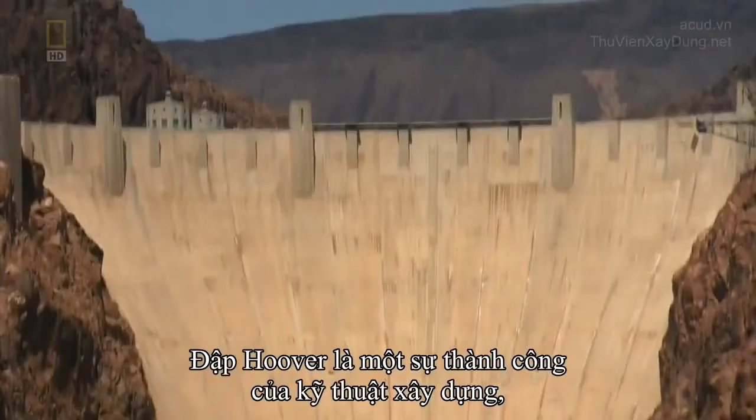The Hoover Dam is a triumph of civil engineering. A spectacular edifice of sculpted concrete, rising majestically in an imposing canyon, taming a wild river once thought to be tameless. A colossal statement, man conquering nature.

But if there was no Hoover Dam, and one must be built, how would engineers build it today? What would they do differently? And what would stay the same? How could we reinvent the Hoover Dam?

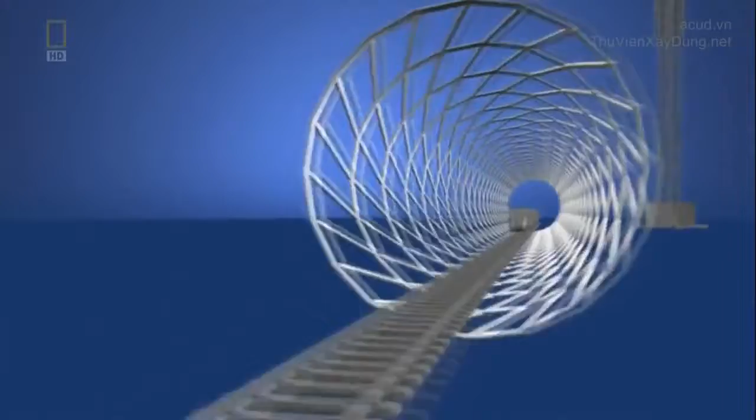The Hoover Dam is an American icon. The United States Bureau of Reclamation built it in the 1930s, and it's been the model of modern dam engineering ever since.

It has three main purposes: to harness the wild Colorado River and control flooding, to store water to irrigate vast desert farmlands and quench the thirst of growing cities such as Los Angeles and Las Vegas, and to provide clean, consistent power to the American Southwest, enabling a population boom unmatched in history.

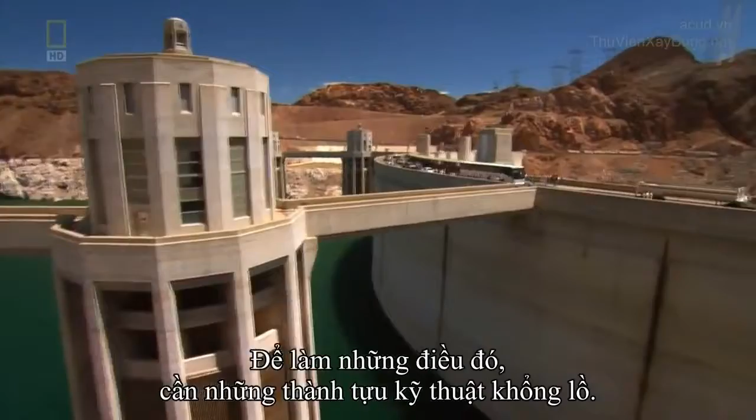To do so required a monumental engineering achievement. When you consider that the Colorado River had been running through Black Canyon for millions and millions of years, actually cutting the canyon in many places, to have been able to move the river, first of all, and then to put this enormous chunk of concrete right in the middle of it was a feat of engineering wonder that had never been done before.

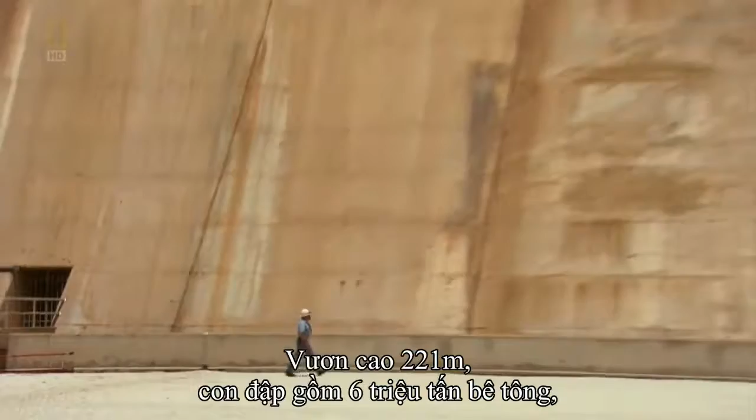When completed in 1935, the Hoover Dam was called the eighth wonder of the world. Rising 221 meters, it contains 6 million tons of concrete, enough to pave a road from New York to Los Angeles. A gigantic concrete pyramid wedged in a desolate canyon, straddling the Nevada-Arizona border, 56 kilometers from Las Vegas.

The reservoir created by the Hoover Dam, Lake Mead, covers 620 square kilometers and has a storage capacity of over 35 trillion liters, enough to cover the entire state of New York in 30 centimeters of water. Hoover's hydroelectric power plant has 17 generators, capable of producing 2 million kilowatts of electricity, enough for 1.7 million homes.

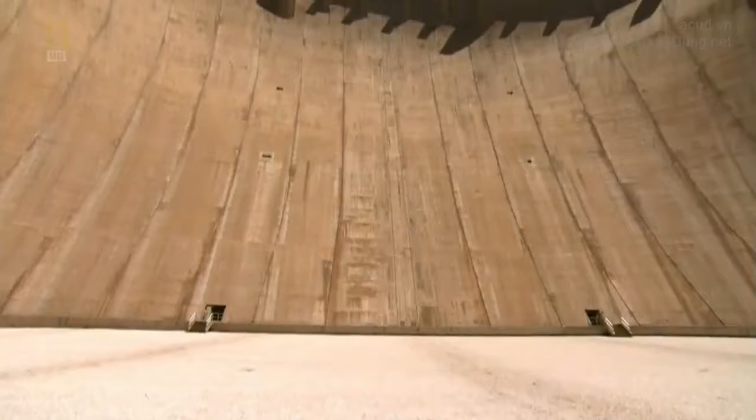I think it's one of the examples of an engineering project where a group of people came together and achieved a very advanced goal as far as the quality of thinking through engineering from beginning to end.

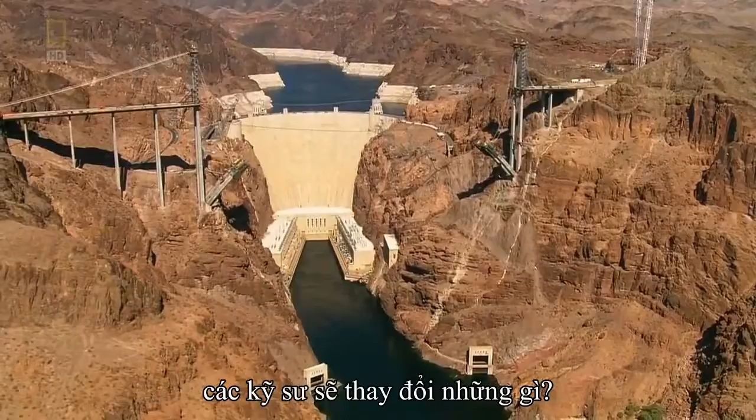But what if the Hoover Dam were built today? What changes would engineers make? And what would they do the same? Would the dam have the same design? Could the reservoir store more water? Could the power plant make more electricity? And what about the environment, above and below the dam?

They really didn't have a sense in the 1930s of ecology and what kind of damage might be done that they couldn't even imagine. They've only begun to realize that in later years. There's this ridge here and this ridge here that are huge natural abutments. We asked a team of engineers, hydrologists, biologists, and dam construction experts to consider these questions and tell us how they would reinvent the Hoover Dam.

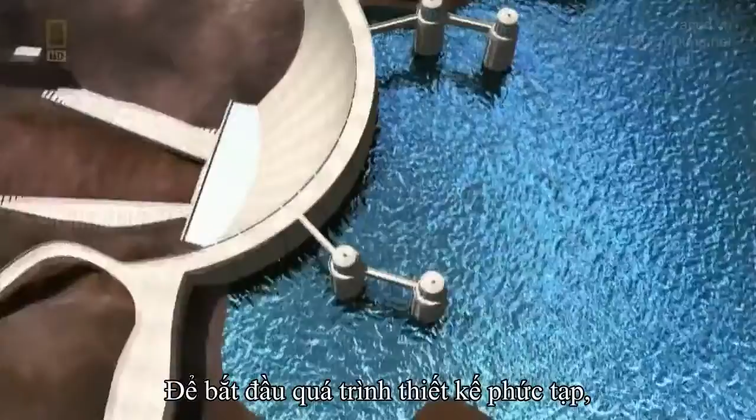To begin this complex reinvention, one must first imagine the location before the Hoover Dam was built. Step 1. Choosing a location. The original survey work was conducted by the Bureau of Reclamation, using the best tools of the day: plane table surveyors for topographical mapping, transits for measuring terrain, and precarious drilling barges barely anchored onto the unruly river, used to drill core samples of bedrock.

Today's survey tools would include GPS imaging of the landscape, laser sighting transits, and computer-aided design software to draft blueprints. Our biggest advantage, you'd have to conclude, is the computer, just the computer system in general. We also have the ability to do aerial survey in a lot more precise manner.

This includes aerial photogrammetry, a sophisticated means of mapping three-dimensional terrain using digital aerial photographs. These modern surveying tools give geologists and engineers a much better picture of the topography and geology of proposed sites.

In the 1930s, three considerations were important to choosing the original location. First, the type of geology of the canyon walls and the depth to the bedrock on the river floor. The rock needs to be strong enough to withstand tremendous loads of water pressure.

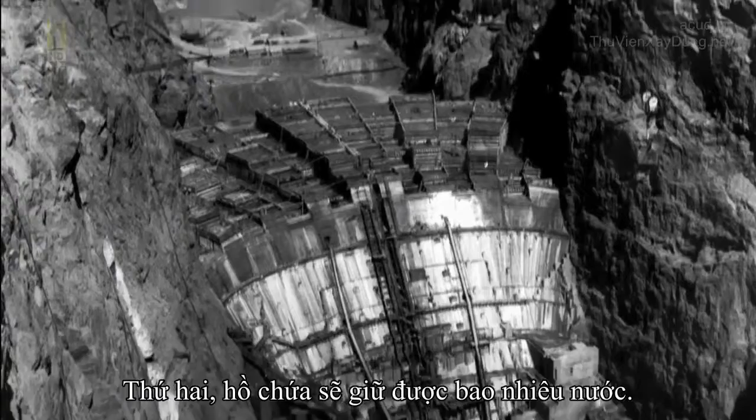Second, how much water could be stored in the reservoir. The more water, the more human benefit. And third, proximity to population centers and major lines of transportation to bring in manpower, equipment, and resources to build the dam.

The process for finding a location for the dam in today's world begins with scanning a lot of topographical maps like this one here. What you're looking for is to let nature, let topography, the existing terrain work in your favor.

After years of study, government surveyors and engineers concluded that a dam of suitable size and storage capacity could be built at one of two locations on the lower Colorado River, in Boulder Canyon or 32 kilometers downriver in Black Canyon. The Boulder Canyon spot was the one that the government favored for a variety of reasons.

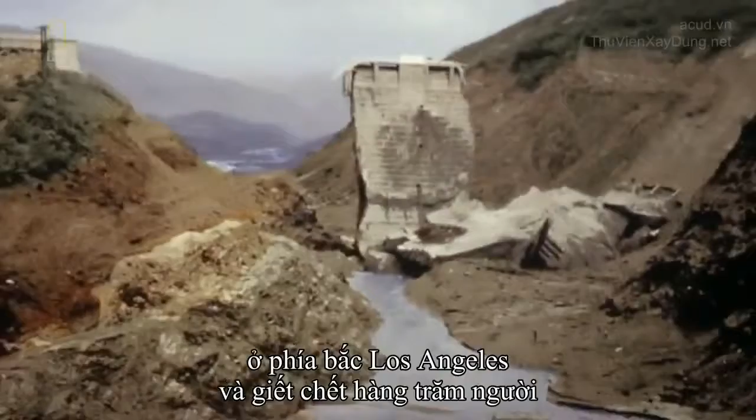But in March 1928, when the St. Francis Dam burst north of Los Angeles and killed hundreds of people, caused millions of dollars worth of damage, the government decided to go back and take a second look at what they were going to do on the Colorado River. The 1928 St. Francis Dam rupture was a crippling blow to the engineers who built it, and a wake-up call to those building Hoover Dam.

Wanting to avoid a similar disaster, government engineers re-inspected both sites more thoroughly and found flaws in the geology of Boulder Canyon. The canyon walls and river bedrock had more fractures and faults, making it less stable. They also determined that a dam in Black Canyon would store more water than one in Boulder Canyon. Finally, Boulder was further away from the nearest railroad lines and population center, Las Vegas. So the government decided the dam would go in Black Canyon.

Original designers of Hoover Dam found an ideal location. After I looked at the topography in great detail, I came to the conclusion that there's no doubt they made the best choice by far. Our reinvention of the Hoover Dam will be built in the same location.

Black Canyon is desolate and severe. A deep, hot crack in the Mojave Desert, miles from the nearest vestige of civilization. No place for human comfort or survival. In the summer, temperatures routinely rise above 49 degrees Celsius on the canyon floor. In the winter, they fall below freezing. It's a hostile environment and the perfect place for a dam. But what kind of dam?

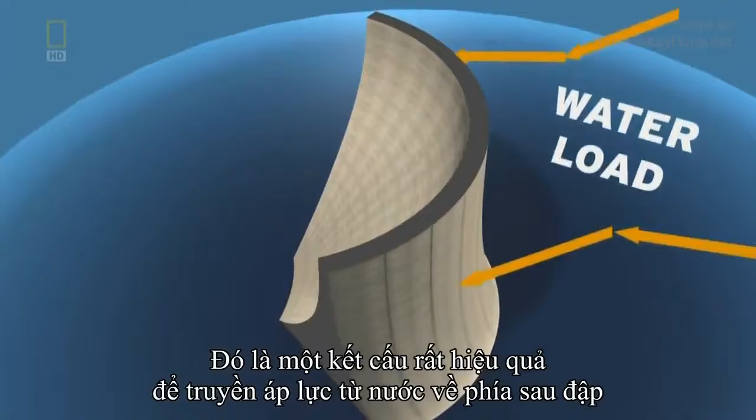And then the upper part that's most visible and prominent is that nice graceful arch shape across the front. And that is a very efficient structure for routing the loads of the water pressure behind the dam into the canyon walls on both sides.

Our reinvention team also envisions a gravity arch dam, but with significantly different dimensions. I certainly wouldn't start out with an ultra-conservative design. We don't have to have quite as much arch, and we don't have to have quite as much width at the base in order to get the strength needed to hold back the waters.

What the team proposes is a narrower dam and much taller, as much as 43 meters taller, capable of storing more water in the reservoir and creating more water pressure for power generation. But that's just the beginning.

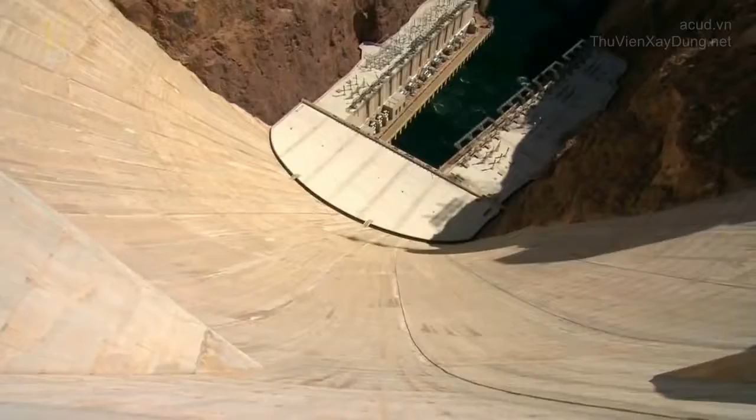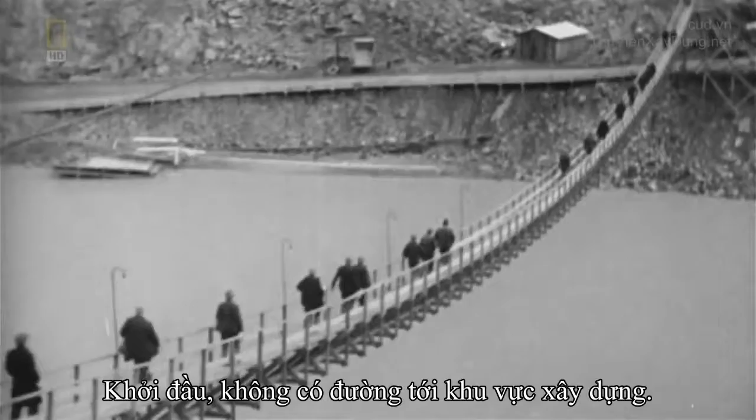The original builders of the Hoover Dam faced many challenges. The first, how to get the manpower and equipment to such a remote location as Black Canyon. To begin with, there were no roads to the construction site. Those had to be blasted out of the steep canyon walls.

50 kilometers of railroad track also had to be laid to connect the construction site to the Union Pacific's main line outside Las Vegas. All built in an environment not suited to human life. Workers came down here to find, first of all, the working conditions almost inhumane. The heat from the canyon, the wind, the lack of cold water, the lack of facilities. It was really a miserable time for workers.

Housing was also a problem. Having a place for the labor to live in the desert wasn't an easy challenge here. Living in a tent in the desert is what you were up against.

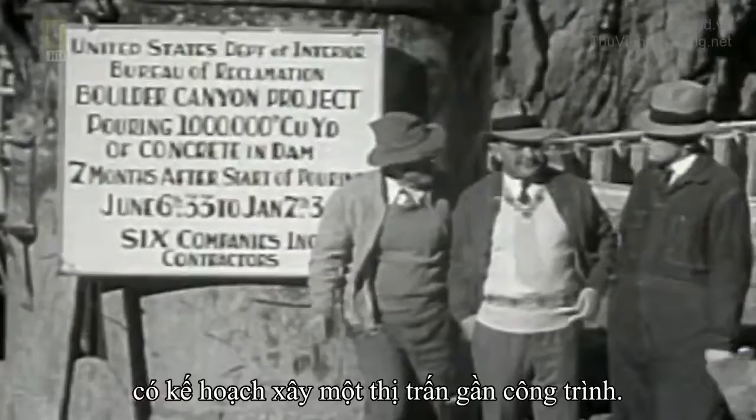When construction began in late March 1931, there were no provisions for a workforce that would eventually reach 5,000 laborers a day. The original builders, the Six Companies Incorporated, planned to construct a company town near the project. But that community, Boulder City, took almost a year to complete. Until then, workers lived in tents and ramshackle bunkhouses along the river with no ventilation or running water.

In any reinvention of the Hoover Dam, the harsh elements would be the same, but worker conditions would be much improved by modern technology. Prefabricated living accommodations would be provided for all workers before the first day of construction. On-site structures with air conditioning would provide necessary relief.

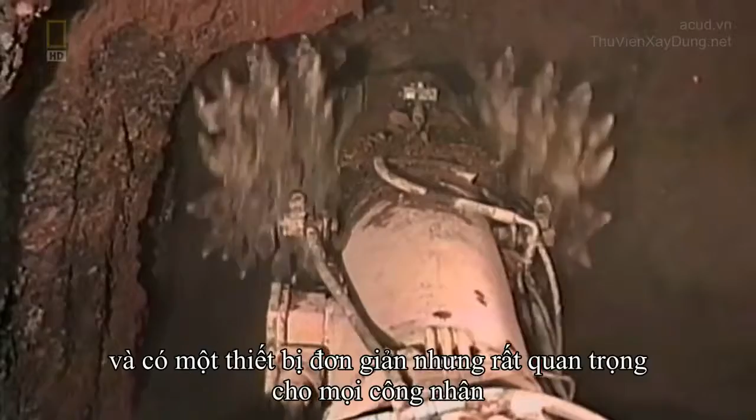Advanced machinery and construction equipment would eliminate much of the tedious manual labor and decrease the size of the workforce by as much as 50%. And there would be one simple but significant piece of equipment for every worker: a hard hat. Today, there's no question, you don't show up on a job like that without a hard hat and steel-toed boots. But that's just the beginning.

I don't think they used any safety nets in the construction of the Hoover Dam. There's no question that we'd use them today. Safety measures were minimal at best. Officially, a total of 112 men were killed during the 5 years of construction at the Hoover Dam.

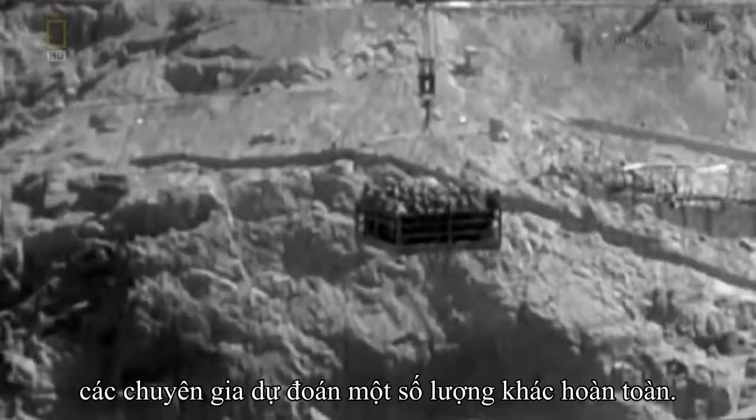In any 21st century reinvention, our experts predict a different number. You would expect no casualties. At least you would be striving for no casualties. You may think cost, you may think schedule, but safety has always been the #1 factor in all construction projects.

The first major task of any dam construction project is the diversion of the river that is going to be dammed. The work site must be completely dry before work can begin on the foundation. The time-tested method of river diversion is the construction of diversion tunnels.

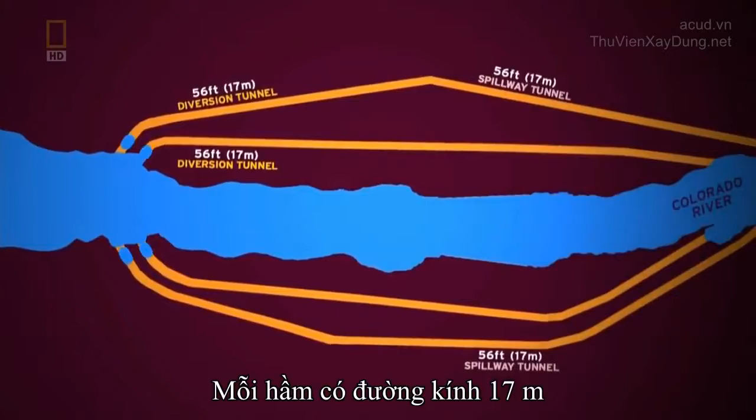In the 1930s, the builders of the Hoover Dam spent nearly 2 years drilling 4 enormous diversion tunnels through the rock canyon walls, 2 tunnels on each side of the river. Each tunnel has a 17-meter diameter and is about 1,200 meters long. Altogether, the 4 tunnels are capable of moving enough water to fill 2 Olympic-sized swimming pools every second.

The method of tunneling in the 1930s was also time-tested: drill, blast, and muck. And it means just what it says. You drill the holes, you put dynamite in each hole, you blast the dynamite, and then you muck out the rock. Crews used an improvised truck called a jumbo, which allowed as many as a dozen workers to drill the face of the tunnel at the same time.

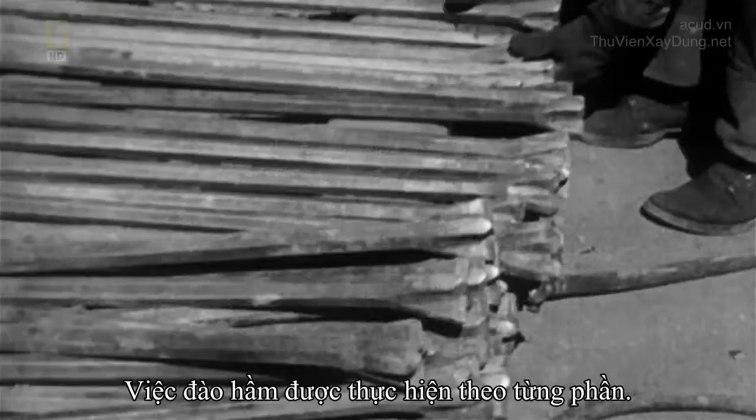The excavation was done in sections. First, the top or heading of the tunnel was blasted and mucked. Then the middle, or bench. And finally, the bottom, or invert section. As each section is drilled and blasted, it is then reinforced with steel. By using the jumbo, the builders of Hoover increased tunneling speed and excavated as much as 14 meters a day.

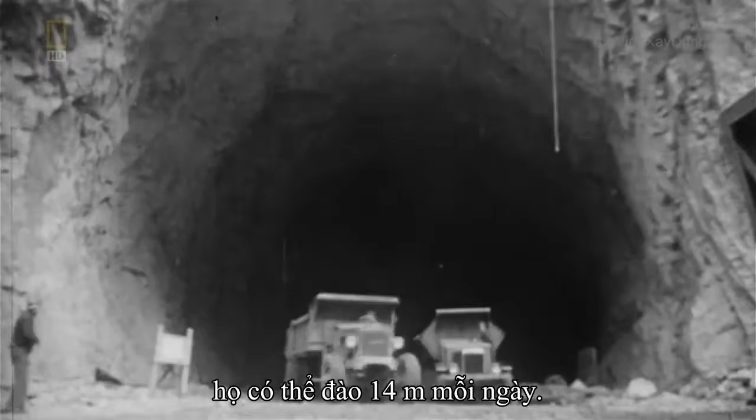But it came at great peril, because there was no ventilation in the tunnels. They were running trucks, internal combustion engines in this enclosed space. So many workers were gassed with carbon monoxide. Some of them died because their pulmonary system was weakened from the gases.

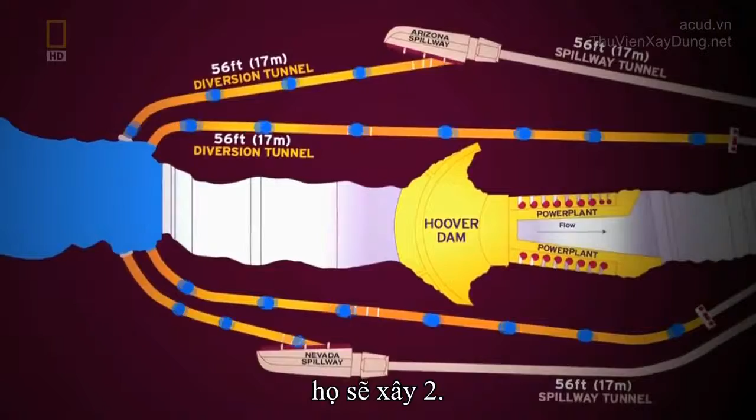Today, our reinvention team proposes a radical redesign of the diversion tunnel system at Hoover. Instead of 4 river diversion tunnels, they would build just 2, one on each side of the canyon. They would be the same length as the originals, about 1,200 meters. But they would be much larger, 21 meters in diameter.

The team would also use a state-of-the-art method of tunneling. The method we use is going to be called the New Austrian Tunneling Method, or in short, NATM, N-A-T-M. Here on the coast of California, near Pacifica, the California Department of Transportation, Caltrans, is using NATM to build 2 new bypass tunnels along a treacherous stretch of Highway 1, known as Devil's Slide.

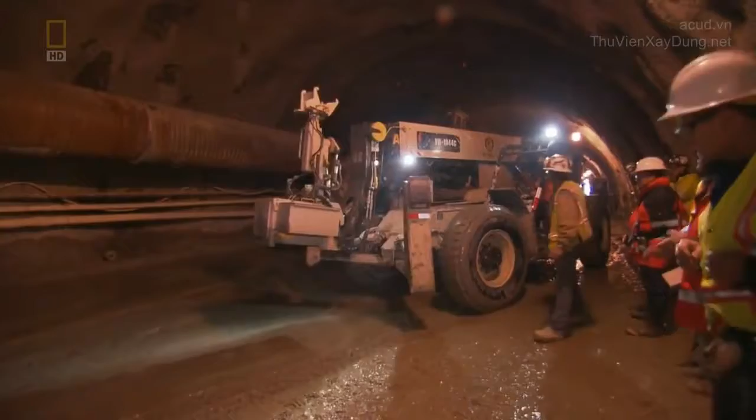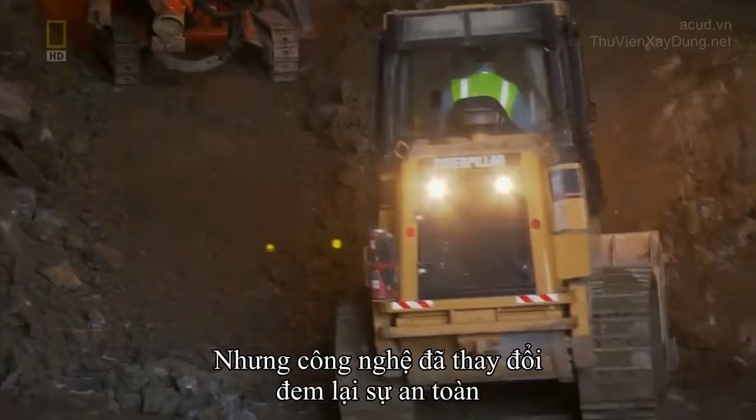Well, this project's been in the works for about 50 years to bypass this geologically unstable portion of the coast highway here. The engineers digging these tunnels are very familiar with the tunneling done at Hoover. This here is very similar. It's also a top-heading bench excavation, and in some areas also invert, but only the technology has changed. And of course, it's a much safer operation than it was at the Hoover Dam.

We're using some state-of-the-art equipment. We have been able to bring the latest technology that is being used in Europe, their latest methods and their latest technologies here in this project.

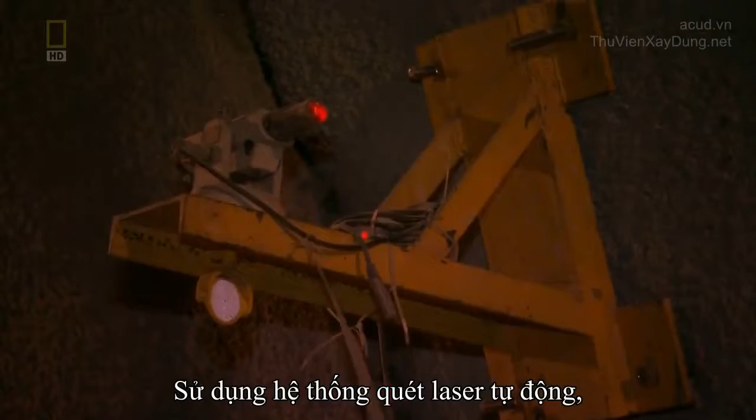Using a fully automated laser scanning system, every 2.5 centimeters of the face of the tunnel is measured and mapped before excavation. This ensures that the tunneling is going in the right direction. Depending on the hardness of the rock, engineers then choose a boring method.

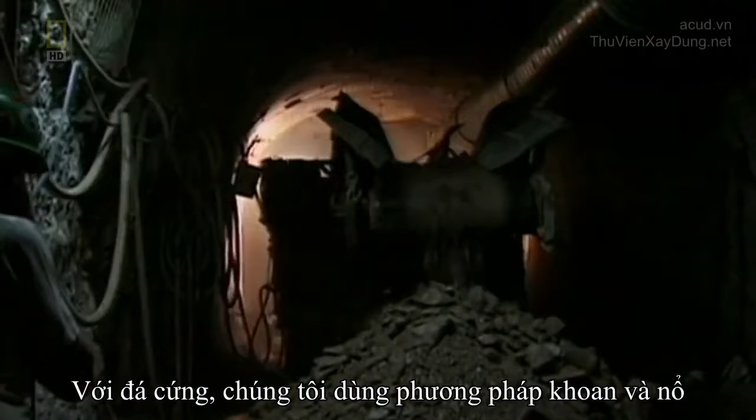There are 2 methods which the contractor can choose. One is drill and shoot, and one is using the roadheader. And in harder rocks, he has to use the drill and shoot method, and when the rock gets softer, then he's using the roadheaders. The roadheader is an enormous excavating machine that grinds the face of the tunnel. In 4 hours, it can chew out 2 meters of rock.

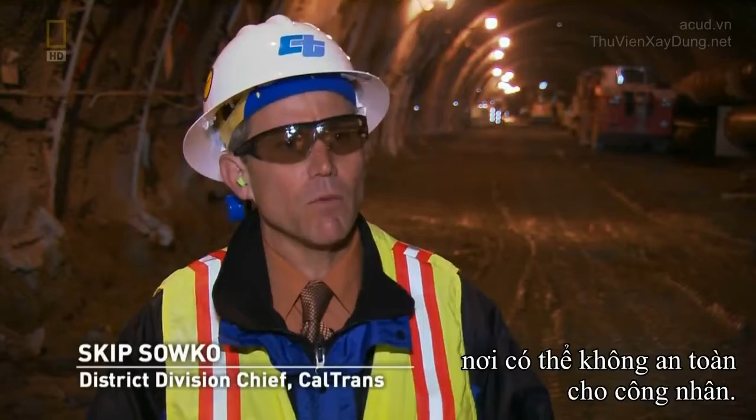After each step forward, the tunnel walls are braced with lattice girders and then reinforced with shotcrete, a type of concrete that seals the tunnel walls. The entire process is geared for worker safety, precision, and increased productivity. A lot of the equipment can be controlled without being in the area where the actual unsafe conditions may exist.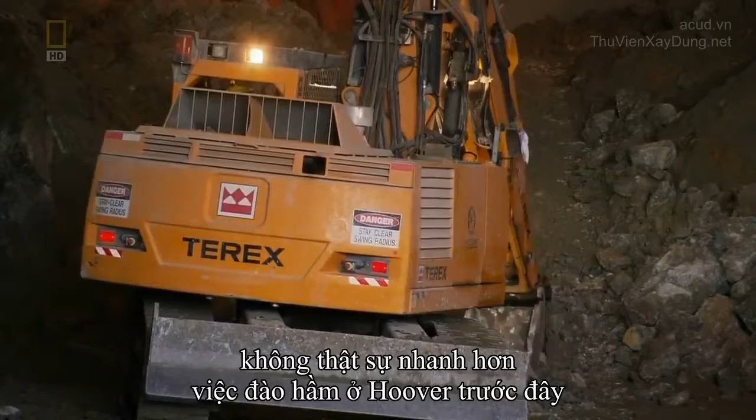So as you move forward, you do a few meters or a meter of excavation. You can do that all under the cover with robotic arms. Using the NATM system, Caltrans excavates about 4 meters of rock, dirt, and gravel a day. Not quite as fast as the original excavation at Hoover, but with much greater efficiency and far less danger.

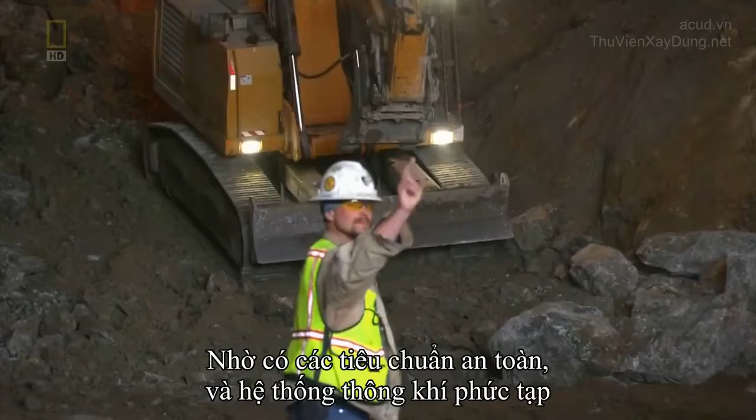In the redesign of the Hoover Dam, the 2 new and larger diversion tunnels would both be excavated using the NATM system. It would take about a year to complete the tunnels, half the time needed for the 4 tunnels built in the 1930s. And because of increased safety standards and sophisticated tunnel ventilation systems, the expected casualty rate would be 0. Once the tunnels are completed, engineers can safely divert the Colorado River and begin to prepare the canyon floor for construction of the new dam.

In the 1930s, contractors began this process by completely drying the riverbed, then excavating loose dirt and sediment down to the bedrock. They also cleared the canyon walls of all loose rock to make smooth abutments for the concrete dam. This work was called high scaling. Workers swung from ropes hanging high over the canyon and chiseled the rock from the walls with jackhammers and sledges.

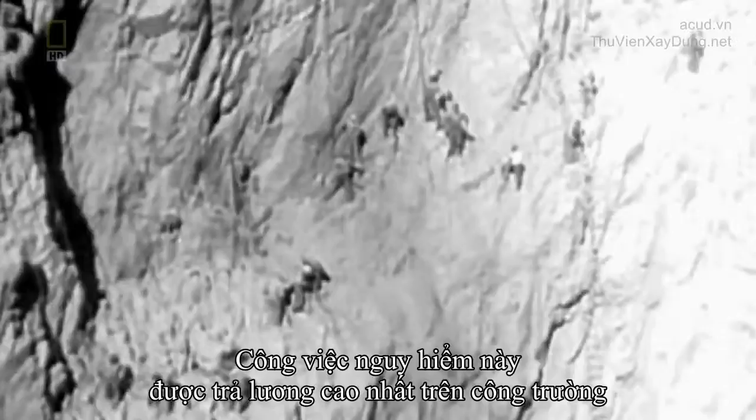These daredevils were the highest paid workers on site, earning $5.60 per day. And they were the most sensational to watch. In today's reinvention, high scaling would also be done in a similar fashion, but with much better rock climbing equipment, nets, and safety procedures.

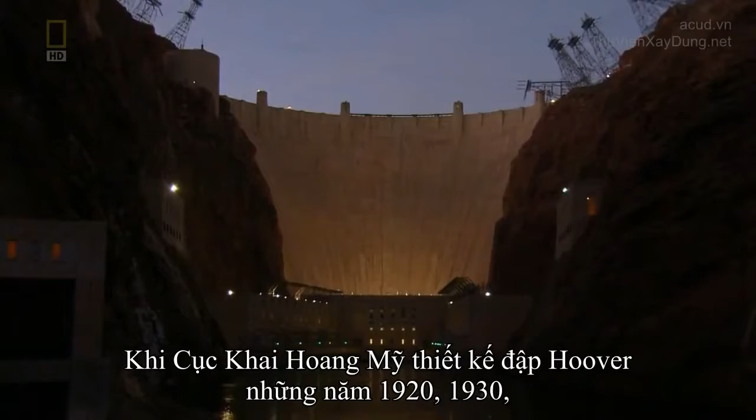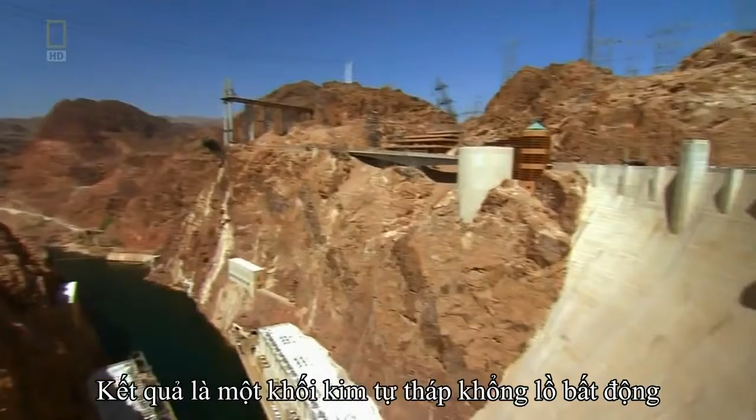When the United States Bureau of Reclamation designed the Hoover Dam in the 1920s and 30s, they adopted an ultra-conservative gravity arch approach to eliminate any possibility of a catastrophic failure. They built the dam with both an arch shape to hold back the pressure of the water, and then just for good measure, they built it as a gravity dam. So it's a combined thick dam and arch dam. The result is a gigantic, immovable concrete pyramid in the middle of Black Canyon, larger than the Great Pyramid of Giza.

The dam contains 3.4 million cubic meters of concrete, weighing 6.6 million tons, enough to build a meter-wide pavement around the Earth at the equator. Using this much concrete, the builders expected the dam to last for hundreds, if not thousands of years. Hoover Dam was far and away bigger than anything that had been built and attempted. And so those designers wanted to make sure that it would last almost forever and be stable and serve its purpose, but would never have an accident or be the cause of a flood as well.

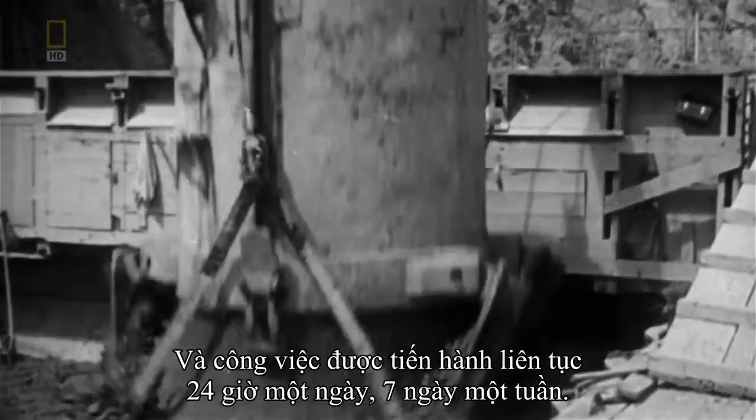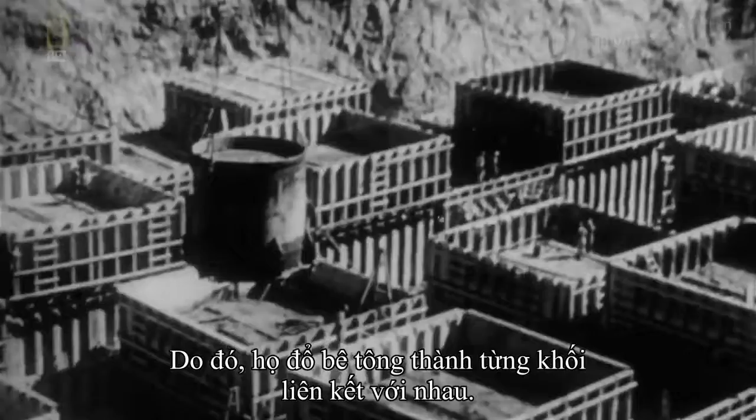The first bucket of concrete was poured on June the 6th, 1933, and the pouring continued non-stop on a 24/7 schedule. Because the temperature of concrete changes as it is poured, engineers calculated that it could take more than 100 years for the dam to cure if built in a single continuous pour. It would also be prone to damaging cracks. So contractors poured the concrete into a series of interlocking blocks. Wooden forms for each block measured up to 18 meters square and were about 1.5 meters deep.

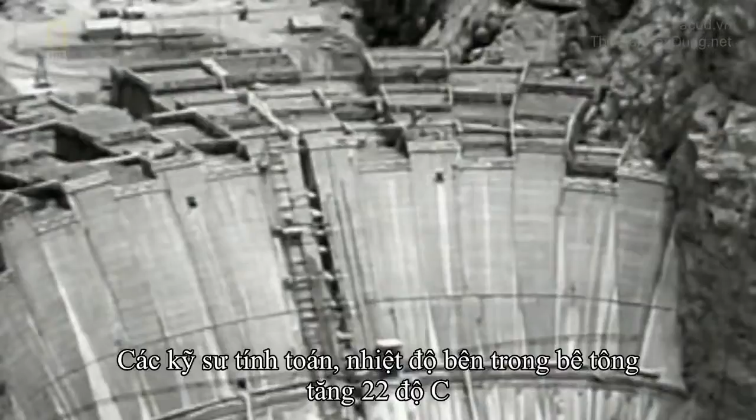Even in these small forms, cooling the concrete was still a challenge due to the intense summer heat in the canyon. Engineers calculated that the internal temperature of the concrete rose 22 degrees Celsius from 49 to 71 degrees. To solve this problem, the original builders installed a grid of pipes in each block and ran cold water through the pipes after the concrete was poured. In all, they used nearly 1,000 kilometers of piping. In March 1935, after 2 years of pouring concrete, the imposing, magnificent edifice of the Hoover Dam was finally complete.

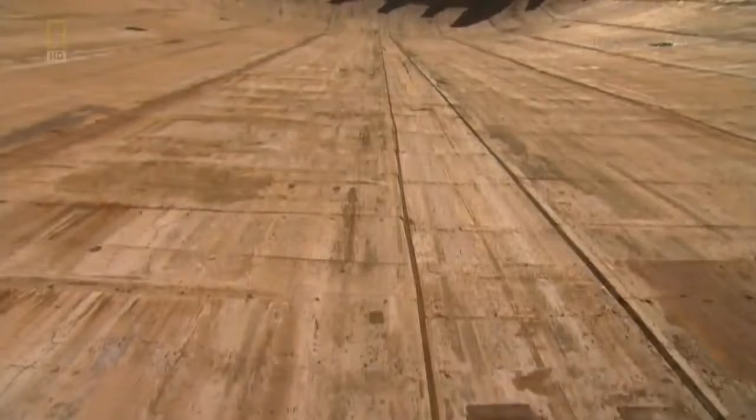Our reinvention team sees a different edifice in Black Canyon. They envision a dam rising 43 meters higher than the original, reaching 264 meters above the canyon floor. At this height, a reinvented Hoover Dam will be among the 10 tallest dams in the world.

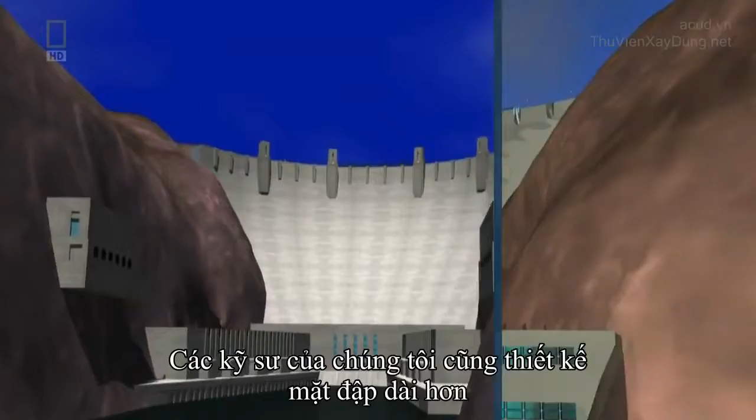Our engineers have also designed it to have a longer length, 531 meters across the canyon, with a base width of 142 meters, but a wider crest width at 21 meters. It's a sleeker, taller design than the original, capable of storing more water in the reservoir and generating more electricity.

Because of the increased overall size of the dam, this reinvention would require slightly more concrete than the original Hoover Dam. You're looking at overall in the neighborhood of about 4,500,000 cubic yards of concrete, which is a rather large amount of concrete. The composition of the concrete, cement, sand and rock, would also be different.

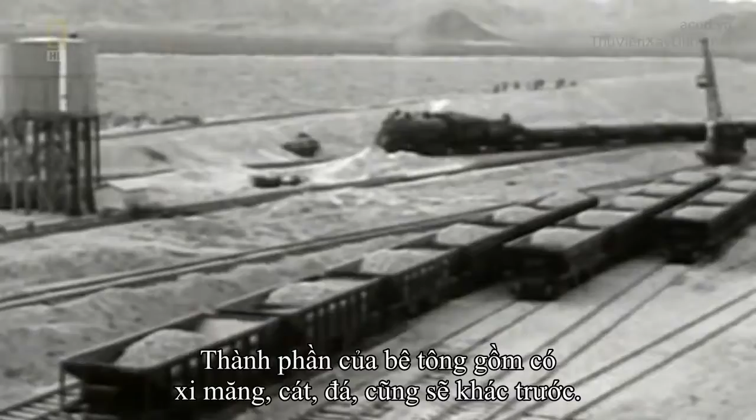In the 1930s, Type 4 cement, which is a low-heat, relatively coarse-ground cement, was a typical cement that was used on large-scale projects such as dams. Today, that type of cement is not available in the western United States. What has been used in recent years is a low-heat version of Type 2 cement, which is slightly different in chemical properties. The issue with Type 2 cement is cooling.

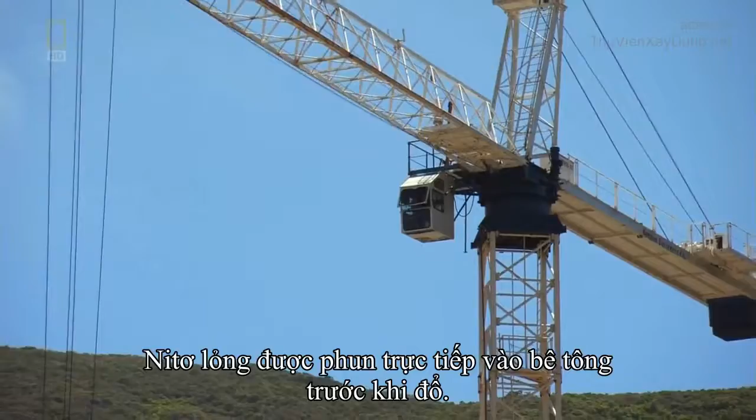I estimate that with the dam that we're talking about here, we will have an average temperature gain of approximately 50 degrees without the post-cooling. And we're going to deal with that by refrigeration. Cold water, ice, and nitrogen. Specifically, liquid nitrogen, which is injected directly into the concrete right before pouring. It's typically only used in areas where you have really high ambient temperatures or where you need to have really low concrete temperatures.

Using modern equipment, our team estimates that it would take about 2 years to pour all the concrete for the larger redesigned dam, the same as the original. By raising the height of the dam by 43 meters, our reinvention team estimates it would nearly double the storage capacity of Lake Mead, enough to cover the state of New York in 60 centimeters of water.

One of the major reasons for wanting that amount of storage is that it gives the dam operator a lot more flexibility to decide when to release water. This increased height and storage capacity would have a direct impact on the hydrology of the dam and the power plant, especially on water pressure and power generation.

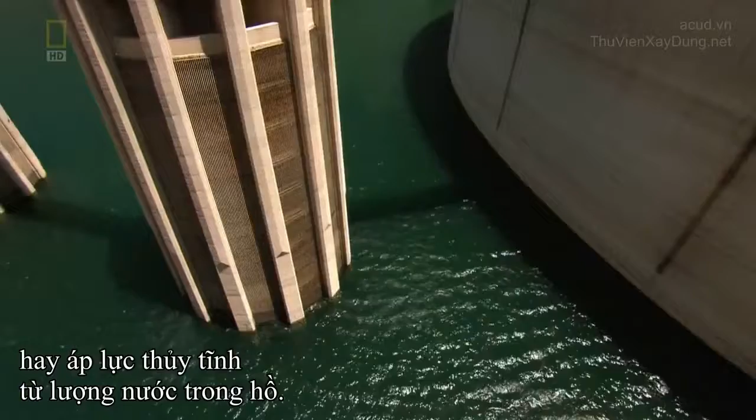We're taking advantage of the additional pressure or hydrostatic pressure from the water body. In this particular case, we're increasing the height of the water body by approximately 140 feet. In doing so, we are essentially increasing the power generation capacity up to about 20%.

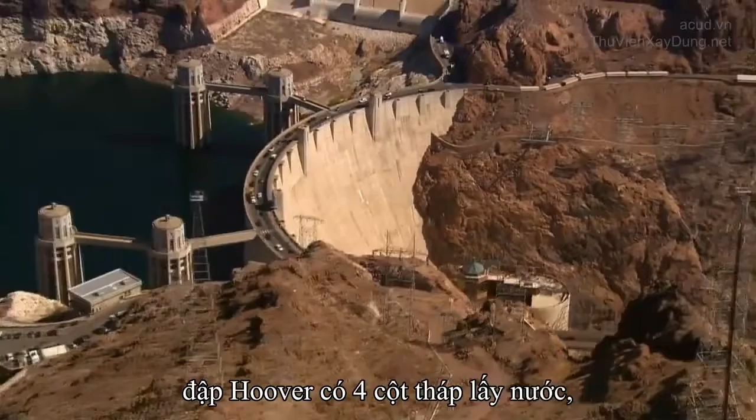The key structures for supplying water to the power plant are the intake towers. As originally designed, the Hoover Dam has 4 intake towers, 2 on the Nevada side and 2 on the Arizona side. Each tower is 120 meters tall, and each feeds water to the power plant through a network of pipes called penstocks.

These intake towers were built to draw water from 2 levels of the reservoir, from the bottom and from the middle. When drawn from the bottom, the water pressure is much greater, which increases the amount of electricity the power plant can generate.

The first purpose of the Hoover Dam is flood control. The second is water storage. The third, which actually pays for the operation of the dam, is power generation. We live and breathe energy conversion at Hoover. Put simply, Hoover uses the water from Lake Mead to spin huge turbine water wheels that crank the massive generator units to make electricity.

A hydropower plant like Hoover Dam makes use of the gravity and the weight of the water in the reservoir. So Lake Mead is roughly 500 feet deep. Well, that kind of water pressure at the bottom of 500 feet of water, that's a lot of available energy. And so if you route that to a water wheel, which will cause a shaft to spin, connect that to a generator, you can harness that energy and convert it into electricity.

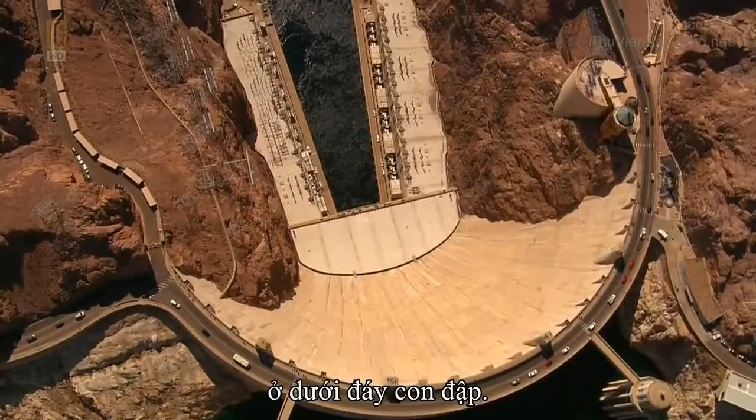The U-shaped Hoover power plant is located on the sides of the canyon walls, at the bottom of the dam. Between 1936 and 1961, 17 generator units were installed in the power plant, 9 on the Arizona side of the dam, 8 on the Nevada side.

Hoover Dam was originally built with some of the biggest equipment that was available and the best technology that was available. We got lots of big machines, really literally millions of pounds of spinning machinery that makes millions of watts of power, clean, renewable hydropower.

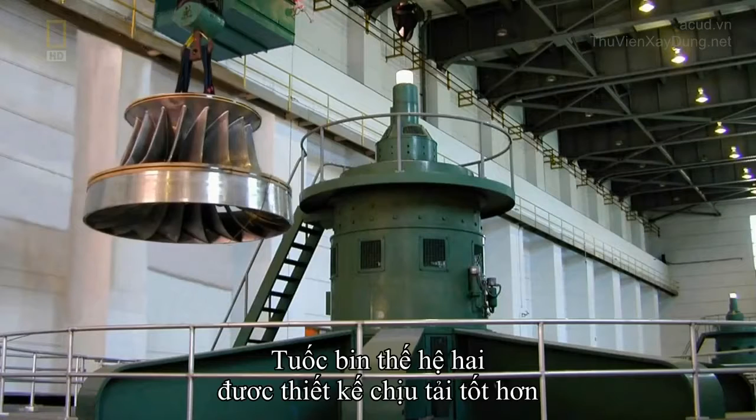The original turbines were made of cast steel. They were capable of generating 80 megawatts each. In the 1980s, the Bureau of Reclamation retrofitted the power plant with new turbines capable of generating even more power. They were retrofitted to be capable of 130 megawatts, a really substantial increase. These second-generation turbines are designed for higher stress loads and improved water flow.

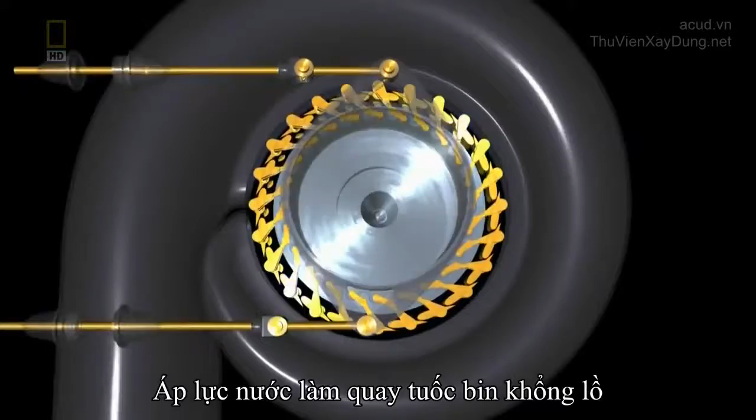Each one is about 35 tons of stainless steel, and this 35 tons of stainless steel might be 16 or 18 feet in diameter and about 6 feet tall. We run 3,200 cubic feet per second of water. The force of the water spins the giant turbine wheel at 180 revolutions per minute, or more than 160 kilometers per hour. The water flows horizontally into the turbine from all sides, down through the turbine to produce the horsepower, and then exits out in the river.

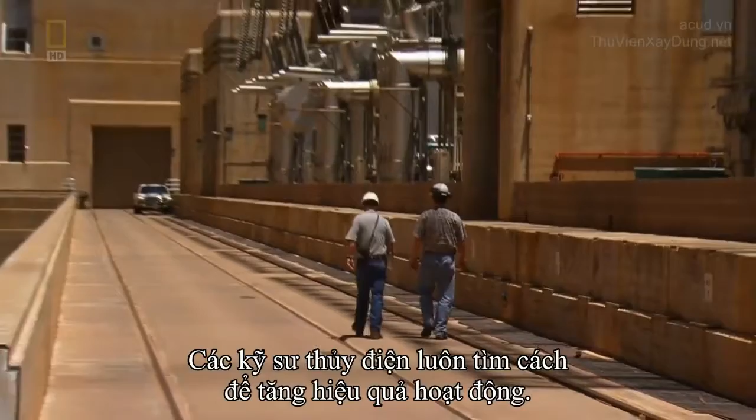At full bore, the Hoover Dam's power plant has the capacity to deliver 2,080 megawatts of electricity at any given moment. Enough power for 1.7 million households. We try to get as much electricity out of the generator as we can get. But hydroelectric engineers are always looking to increase capacity and performance. We're in a continual state of change from an equipment standpoint, trying to get the most energy and the most value out of the equipment at Hoover Dam. It's really, in our mind, a national priority.

Today, the USBR is already in the process of reinventing its power plant at the Hoover Dam. We continually look at technology. Technology is your ally in any energy conversion business. We look at turbines which can operate efficiently at many different lake elevations. When the lake level fluctuates, it directly affects the amount of water pressure driving the turbines. The higher the lake, the higher the water pressure. Today, Lake Mead is about 30 meters below normal capacity, so the water pressure going through the penstocks to the turbines is decreased.

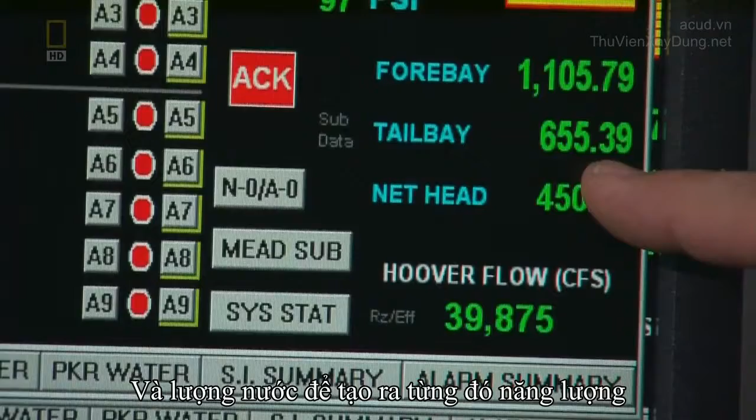And the water to produce that power is shown down in the lower right-hand corner. It's 39,800 cubic feet per second. If we multiplied that out, that'd be roughly 300,000 gallons of water a second. That'd be 30 swimming pools a second. That's a lot of water.

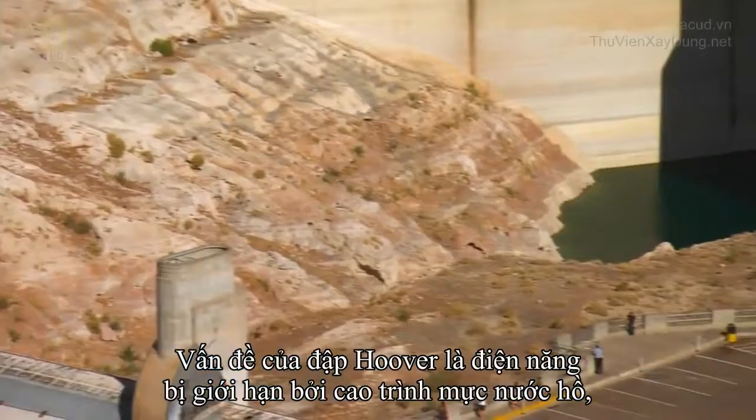The problem at Hoover is that power production is limited by the elevation of the lake, which dictates the water pressure driving the turbines. My existing turbines don't necessarily operate as efficiently as they could at all these different lake elevations. The modern design turbines operate efficiently with what's called a balanced pressure blade design at many different lake elevations. That's one of the things that we have on the drawing boards.

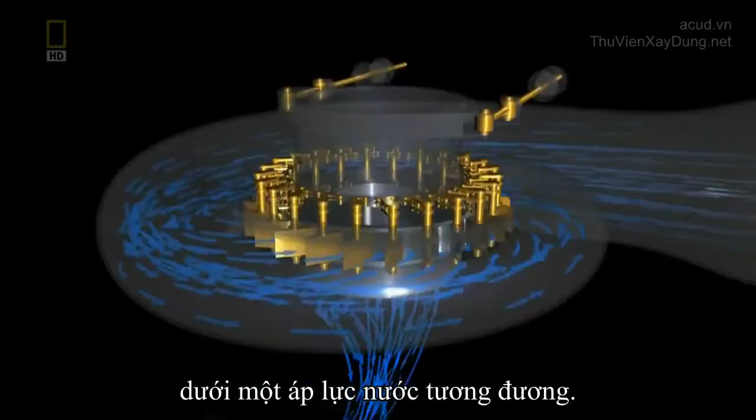Making more electricity is all about getting a water wheel to spin faster with the same amount of water pressure. And the next generation hydroelectric turbines do this. These are already in use at the Three Gorges Dam in China. They borrow technology from the aerospace industry. The individual blades are curved like jet turbines for improved water flow efficiency, making them capable of handling greater loads. But more importantly, they can spin faster with the same loads, which will increase power efficiency at Hoover.

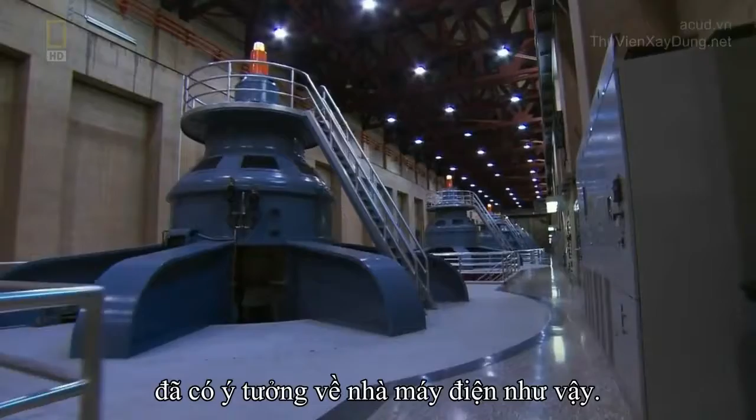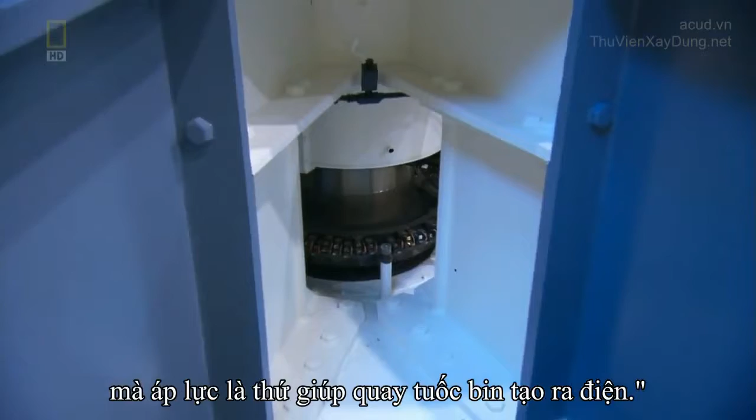Our reinvention team has its own ideas about the power plant and control systems. Firstly, they would seek to increase water pressure to the turbines by increasing the overall height of the dam and the intake towers. One of the major benefits of a higher dam is that when the water is at a higher elevation, you've got more pressure, and pressure is part of what runs the turbines and creates energy. They will be spinning faster. Power generation increase will likely be about 20%. So we're looking at probably about 150 megawatts per unit at this time.

By installing these next-generation turbines, Hoover will increase its power efficiency once again. But as the engineers who operate the Hoover Dam look to the future, they face other critical challenges that the original builders of the Hoover Dam could never have imagined.

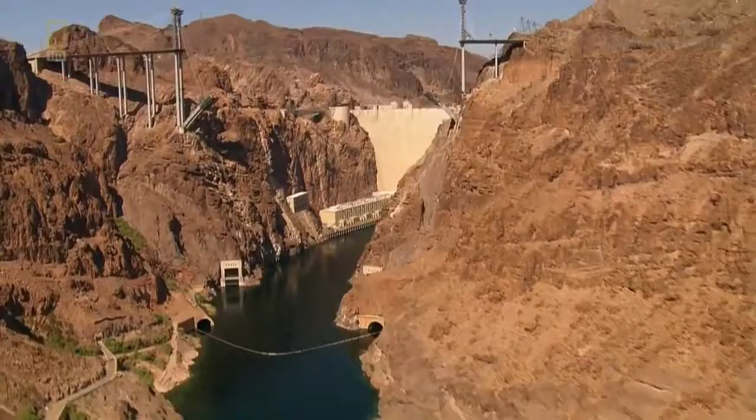On February the 1st, 1935, the builders of the Hoover Dam closed the river diversion tunnels and began to impound water in the new reservoir, giving birth to Lake Mead. 6 years later, in August 1941, the water level finally reached the height of the spillways, just below the crest of the dam.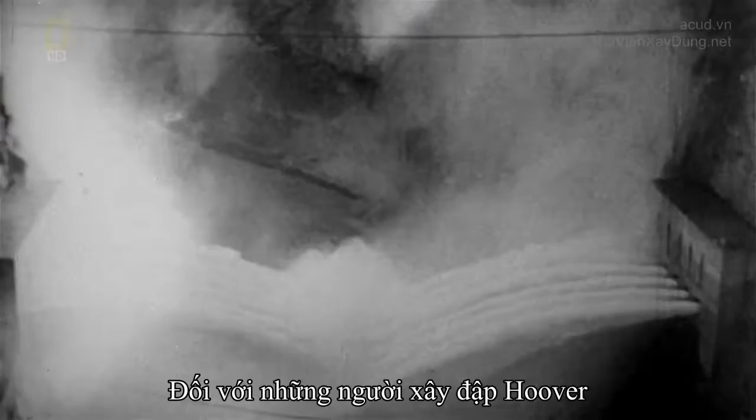They wanted to test the spillways and see if they were going to work. They were hoping they would work, and they did. For the designers and builders of the Hoover Dam, it was a moment of triumph and relief. The dam was functioning exactly as planned. But they didn't give a thought to the ecosystems that were being destroyed in the process.

I would imagine that, without saying that they didn't care about the environment, as a decision-making criteria, it probably wasn't taken into consideration. I would imagine that coming out of the Depression era, trying to put people back to work was a primary concern of the federal government. The river was very rich with flora and fauna, and the rising of Lake Mead destroyed all that. Today, there are a variety of environmental issues facing the Hoover Dam that must be addressed now and in the future.

Our environmental concerns include invasive species. And in fact, over the past year, Lake Mead and much of the Colorado River system downstream is now affected by something called the quagga mussels, a variety of zebra mussels, very small clam-like animals, and they're very prolific, so they grow and breed quite rapidly. They have the characteristic of being able to clog up machinery in power plant piping. That is an environmental situation we're now managing at Hoover Dam.

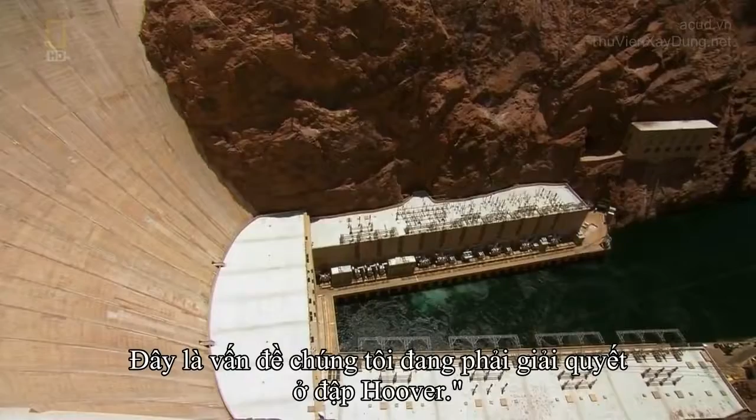The quagga mussel is not just a problem at Hoover. It's a ubiquitous problem for dam operators around the world. This is an immediate issue that needs to be put into the design to make sure the facility can handle any potential intrusion of quagga mussel, to control it, to prevent it from entering our system, and if it gets into our system, how we can deal with it to eliminate that. We're looking at a couple of very environmentally friendly filtration techniques. We'd like to do some sort of filtering as opposed to chemical treatment. So that's our emphasis at the moment.

Eradicating the quagga mussel is just one concern for our reinvention team. They're also looking carefully at the ecosystems above and below the dam. One of the major issues with the dam will be that we are creating a unique habitat. We're creating a lake where before there was only flowing water. And the river below the dam becomes highly modified. Instead of rising suddenly, it becomes very stable.

Because the primary purpose of any dam is flood control, the natural cycle of flooding is eliminated from the downriver reaches, and the river ecology is forever altered. The river loses nutrients and the regular flow of sediment. Sediment is vital to any natural river environment. But when sediment cannot pass through a dam, it piles up in the reservoir, sometimes rising to damaging levels.

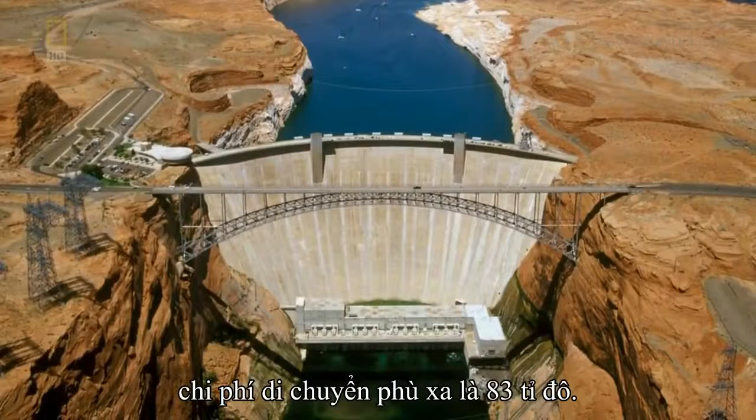Now, when Hoover Dam was constructed, a delta of sediment was formed at Lake Mead, 42 miles long. That sediment, that sand and gravel, belongs to a river, belongs to the downstream reaches. It does not belong in a reservoir. Sediment removal is also extremely expensive. At Lake Powell, where the sediment buildup has exceeded the design levels behind the Glen Canyon Dam, the estimate for removal is $83 billion. To remove $83 billion of sediment from Lake Powell is beyond imagination, beyond accepted economics.

If we have to redesign the Hoover Dam, or any dam for that matter, we should take into consideration passing the sediment around the reservoir, bypass it. The Japanese have pioneered an innovative solution to this sediment problem. Here at the Asahi Dam, they've constructed a tunnel around the reservoir to carry nutrient and sediment-rich river water downstream of the dam. It's an idea that the Hoover Dam reinvention team has embraced.

My concept would be to have a tunnel through the rock, around the reservoir, downstream of the concrete dam, and let the sediment be discharged downstream of the dam. The reinvention team proposes an 85-kilometer long concrete-lined tunnel or pipeline, 6.7 meters in diameter, reaching from the mouth of Lake Mead to a point downstream of the Hoover Dam.

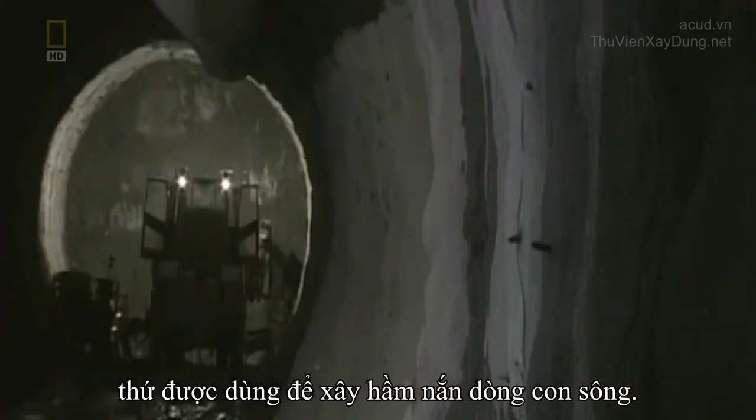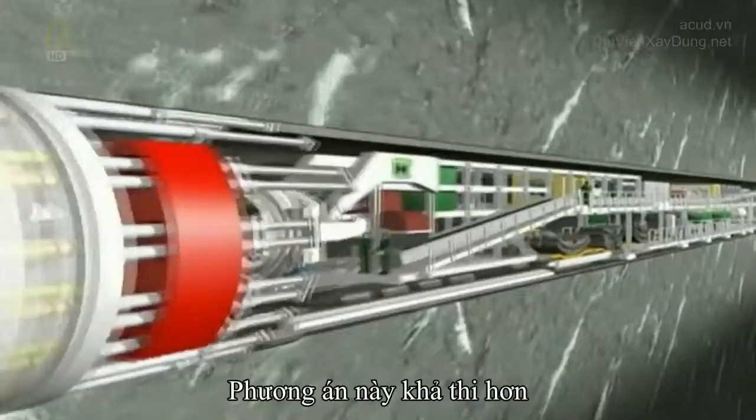To build this long tunnel, our team would not use the new Austrian tunneling method they suggest for the river diversion tunnels, but instead would use another method, a tunnel boring machine, known as a TBM. This massive beast bores long tunnels like a mole. You can take advantage of the cost advantage or the economics of a TBM because you build a TBM once and you can drive a long distance. And the diameter of tunnel is feasible for a tunnel boring machine for the sediment tunnel.

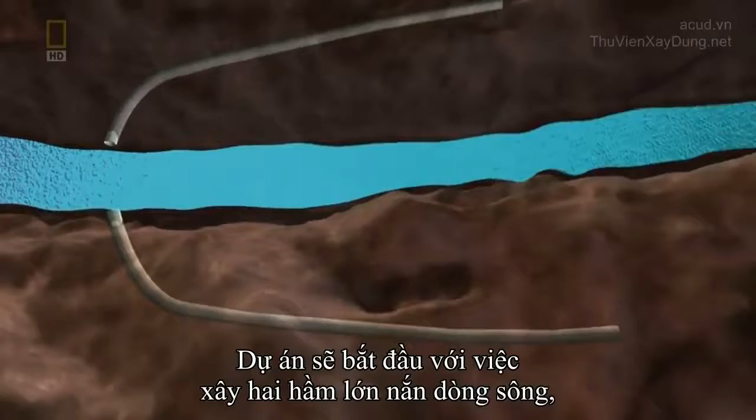Once built, this innovative sediment tunnel would solve several environmental issues at once, reducing sediment in the reservoir and maintaining the natural ecology of the Colorado River on its path to the sea. It is also the final feature of a reinvented Hoover Dam, which can now be unveiled. The project begins with two massive diversion tunnels, one on each side of the canyon. They will divert the Colorado River around the dam site during construction.

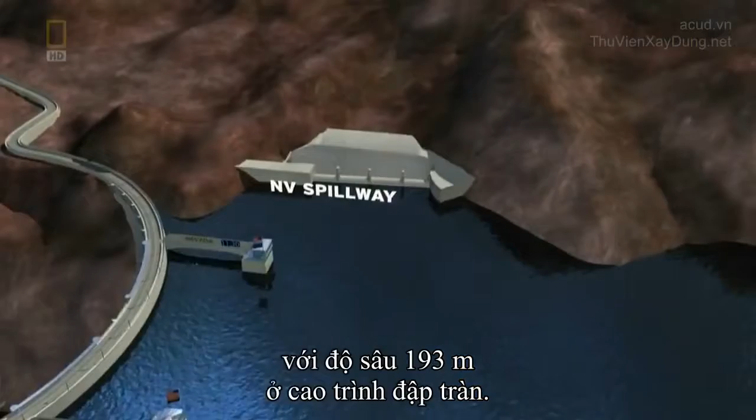The new dam rises 264 meters above the canyon floor. It's 138 meters thick at the base and 20 meters thick at the top. The crest length is 518 meters across the canyon. The new reservoir will contain almost double the amount of water, with a depth of 193 meters at the spillway elevation. Two rectangular-shaped intake towers will stand on each side of the dam. Each tower will be 160 meters tall and draw water from 7 different levels. The water will flow through penstocks in the diversion tunnels to the power plant.

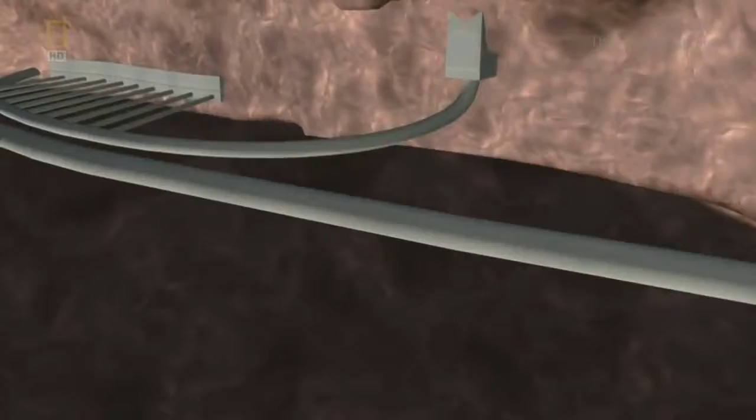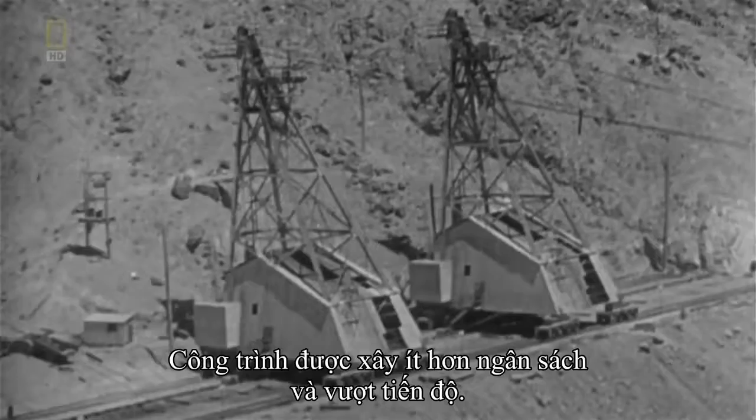The power plant will be equipped with state-of-the-art turbines, capable of generating up to 150 megawatts each. And the 85-kilometer sediment tunnel will help maintain the natural ecology of the river. In the 1930s, the government paid $49 million to build the Hoover Dam, and the project came in under budget and ahead of schedule. In the 1990s, it cost more than $100 million to build the new Hoover Dam Visitor Center. Any reinvention of the Hoover Dam today would cost significantly more. By standard indexing, the cost estimate would exceed $6 billion, and this would exclude the 85-kilometer sediment tunnel.

It would also take considerably longer. Just to get started, an environmental impact study would have to be conducted. An EIS process for building something of the scope and scale of Hoover Dam, 10 years would probably be a minimum. It might even be more like 15, and that's before there would be any litigation. And I would guess that the price would be somewhere between $250 and $350 million to complete that kind of a work. Then there will be years of research, followed by more years of design, though the actual construction phase might be shorter than the original 5 years.

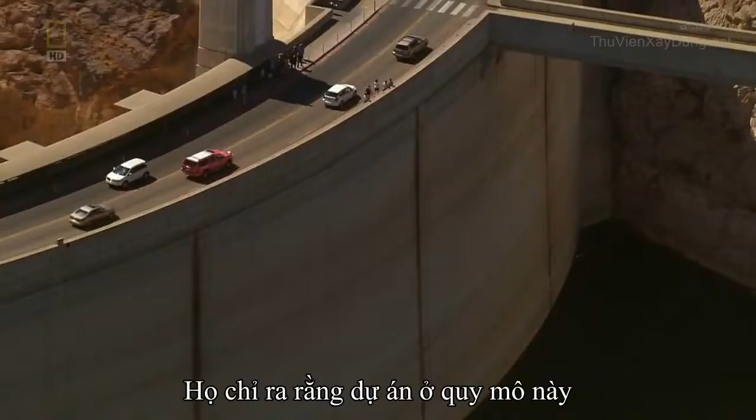This reinvention team had no more than a few hundred hours to contemplate, calculate, and construct their imaginative design. They point out that a real project of this scope and magnitude would require thousands of hours of work and millions of calculations by hundreds of qualified individuals in a wide array of engineering-related fields. It would be a monumental task, just as it was in the 1930s.

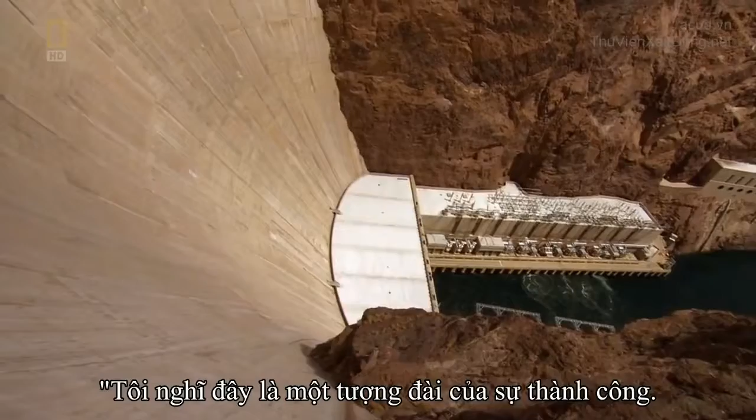I think it's a monument to success. They could conceive of this dam on paper and draw it out and imagine it in all kinds of ways, but they actually made it happen. They believed in what they were doing, and they knew they were trying to change the world, and I think that's what gave them a vision towards a goal together. Sometimes I wonder if a group of people today could work together on that level and produce that type of superior product. What is certain is that the original builders of the Hoover Dam did not see their engineering wonder of the world as a temporary structure.

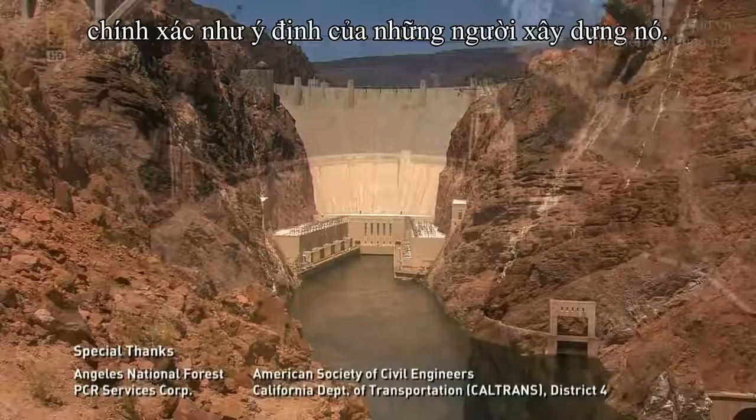The future of Hoover Dam is beyond all of us here. Hoover Dam will extend into the ages, will serve this country longer and beyond anything that we can think of. Just like the Great Pyramids of Egypt, the Hoover Dam may last for thousands of years. Exactly what its builders intended. And if reinvented today, engineers could only hope to create such an enduring monument to human achievement.